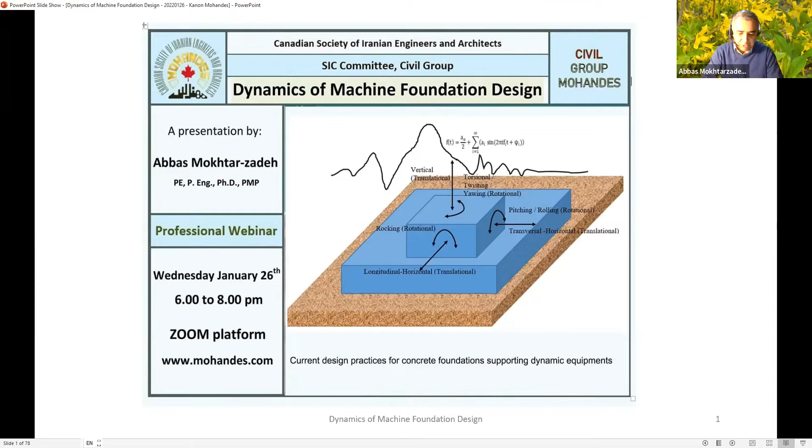Okay, the subject that I choose is dynamics of the machine foundation. As you see on the picture, there are some diagrams, nomograms, graphs, and some mathematics, but please don't be scared about the mathematics, because as engineers we deal with this every day, and we can grasp the basic topics of mathematics and understanding that is fundamental for our engineering practice.

At the beginning, I would like to express that whatever opinions I make in this presentation are my own. I don't represent my employer or the code and standard committees that I'm a member of, and I'm not a voice of those. Whatever I present here are items that I collected along my career from different sources, which I've compiled for this presentation.

As a brief outlook and abstract for the presentation, this is about the mechanics of machinery vibration. It belongs to the vibration theory of mechanics and structural mechanics, and it has applications in many industries like power generation, petrochemical process plants, manufacturing, land, sea, and air transportation, heating and air conditioning, aerospace, and computer disk drives, which recently became a major sector in industry, textiles, and home appliances.

And those are major items, some rotating, some reciprocating, and also impacting masses, which require a special mass and foundation design for the dynamic forces.

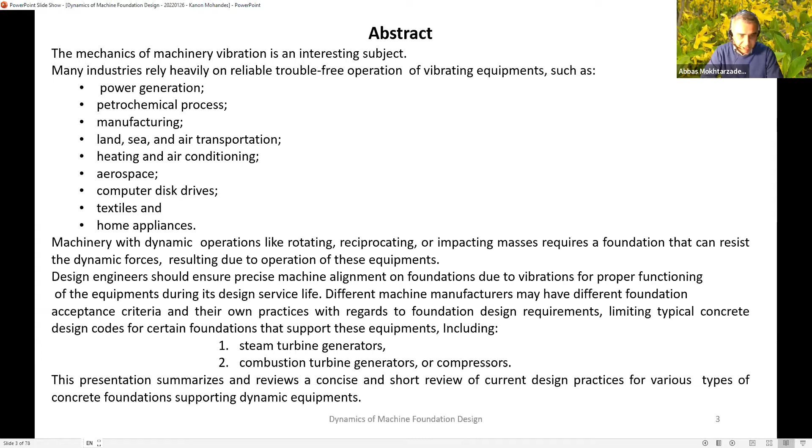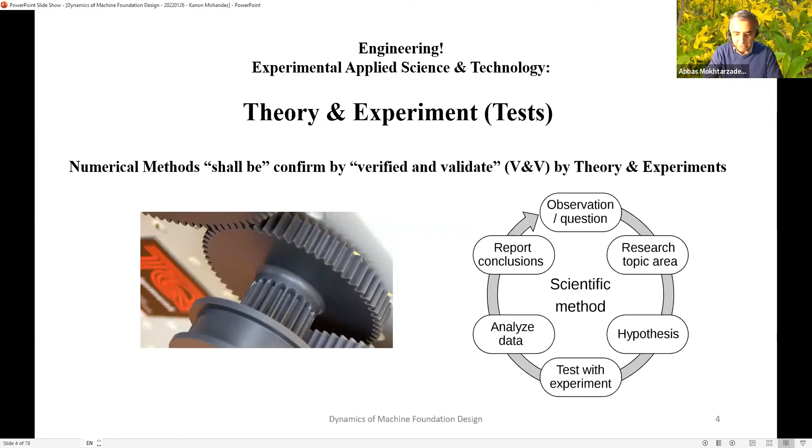Before beginning, I would like to emphasize two major items. In all engineering applications, we apply two considerations: one is theory, based on mathematics, and one is experiment and test, based on actual lab or experimental tests. The numerical methods we currently use, such as finite element analysis, should be confirmed, verified, and validated by theory and experiment. This makes it a circular way of applying the scientific method to our considerations.

The content we're going to go over briefly covers 8 subjects. First, we'll review the various types of dynamic foundations. Second, we'll briefly look at what's dynamic versus static, and why they differ. Third, we'll look at what modeling concepts we should consider. Item number 4 is dynamic analysis and the codes related to this type of foundation.

In chapter 5, we're going to go over the basic design data that we need. Item 6 is the core of the design, as we deal with strength and stability investigation. Item 7, we'll address dynamic analysis techniques very briefly, and item 8 covers some environmental aspects of the analysis as well.

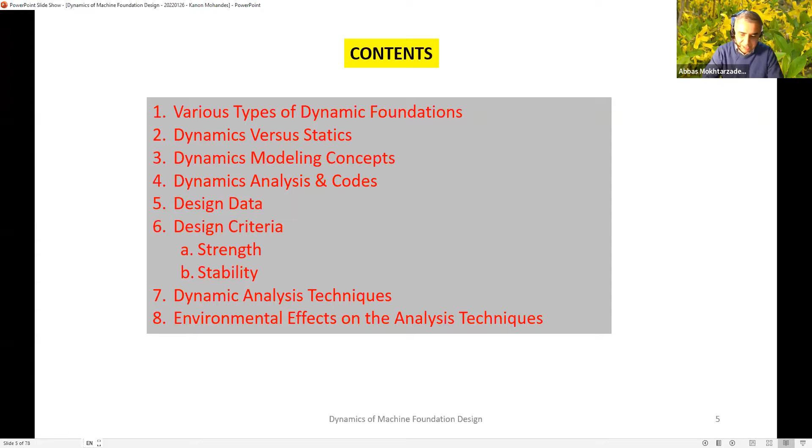In the first section, we're going to review the basic types of dynamic foundations.

The general conditions that we normally consider for every engineering project design are listed here, and many of you are aware of those. I highlighted in red some of the items that are very particular to this kind of machine foundation. We need to have a machine base configuration, which normally comes from the manufacturer.

Item 3 is a process requirement: what elevation we need to have this machine equipment located, and also number 4, what type of load we need. Most of the loads, in addition to dead load and live load, come from the manufacturer, and we need to have those before the design process.

Also, some of the amplitude and vibration requirements come from the manufacturer, item number 5, and items 6, 7, and 8 as well are requirements. As I mentioned, the majority of these items shall come from the manufacturer, and we need to have close correspondence with the manufacturer to get that data ready for evaluation in the design.

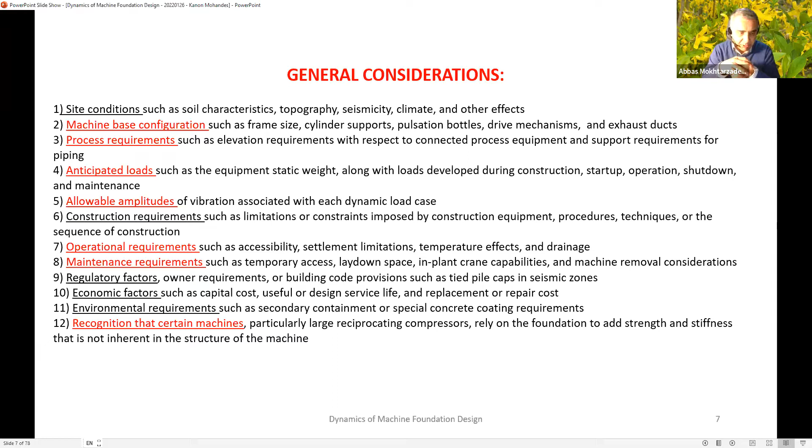We go first to the type of the big rotating machinery that we have. You see on the right side some pictures. This is a nomogram, kind of a free body diagram of this rotating machine, and on the bottom right you see a typical picture of one of these rotating machines normally used in power generation, consisting of different components that are important for investigation.

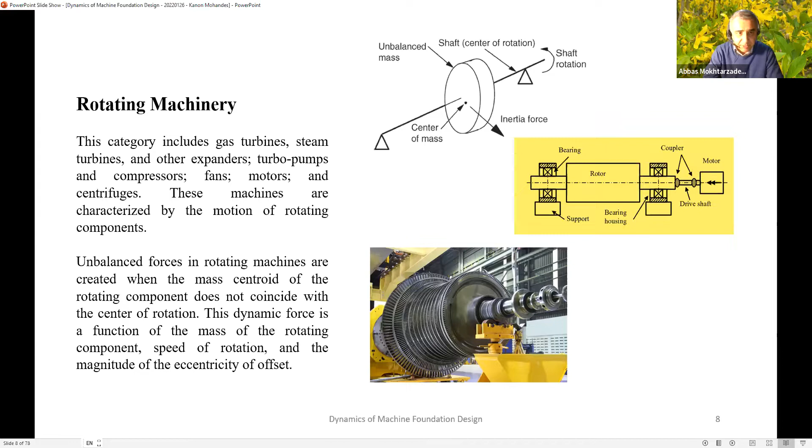Next type of big industries are dynamic foundations or machine foundations, impulsive machinery that is mostly used for hammer components and foundations, used for shock and impact in different industries, like generating ceramics or forging metal or other kinds of material in the industry.

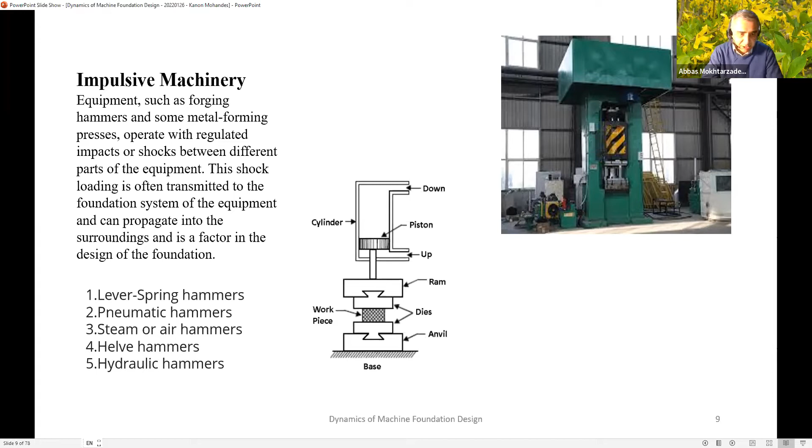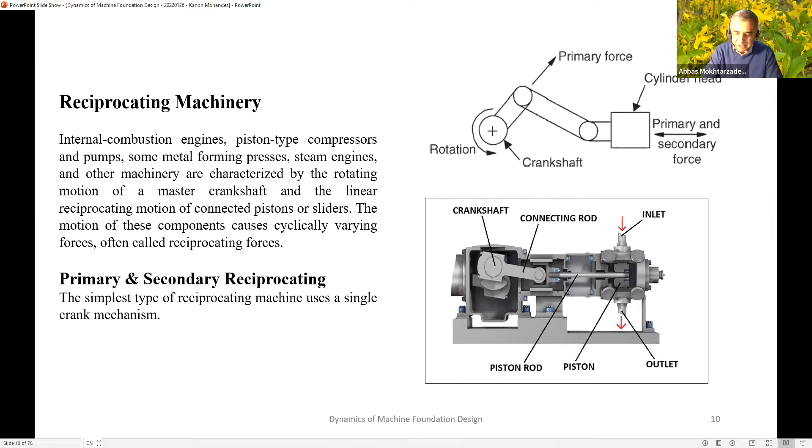About the foundation type, if we focus only on the type of foundation that we have, we may have several lists of foundations that we call different terminology in the industry.

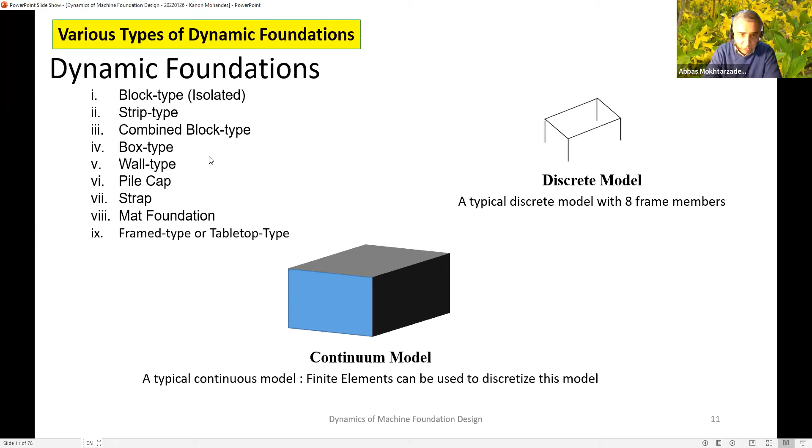On the upper right and lower middle, you see discrete models or continuum models, which mostly come into play in the industry as a kind of finite element numerical method. You may use these types of methods, either as a frame element like a discrete method, or a continuum model like a finite element mesh in the system. We'll go over typically to show how each one looks.

Block type foundations are typically a mat foundation with a pedestal on top. Combined block type foundations are similar, but we may have several pieces - here I show 2 pedestals, but we may have 2 or 3 or more, combined with different equipment sitting on different pedestals. Or in some cases, we may have a single foundation mat, shown on the lower left and lower right.

We have table-type foundations that are mostly used in petrochemical plants and mostly in power plants for hosting the turbine and generators. These holes that you see on the table top are needed for the piping or routing of the various components of the equipment on the foundation.

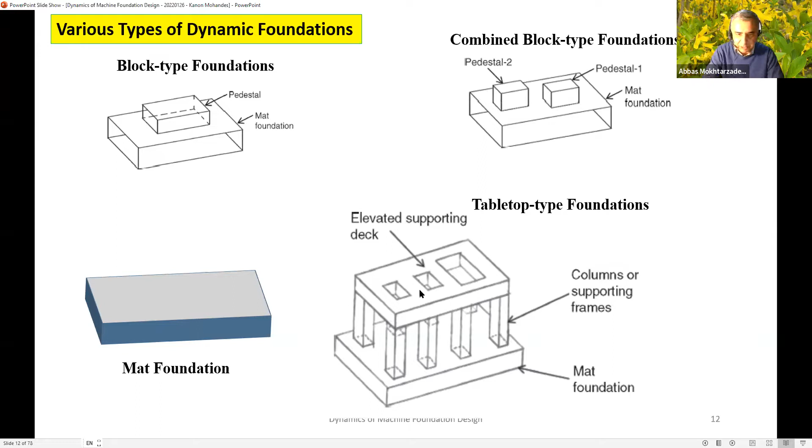Another general type of foundation is the strip type, which is a kind of very long strip like a mat foundation, or a wall type, which is kind of two walls sitting on the mat and hosting the deck, the foundation, and the equipment.

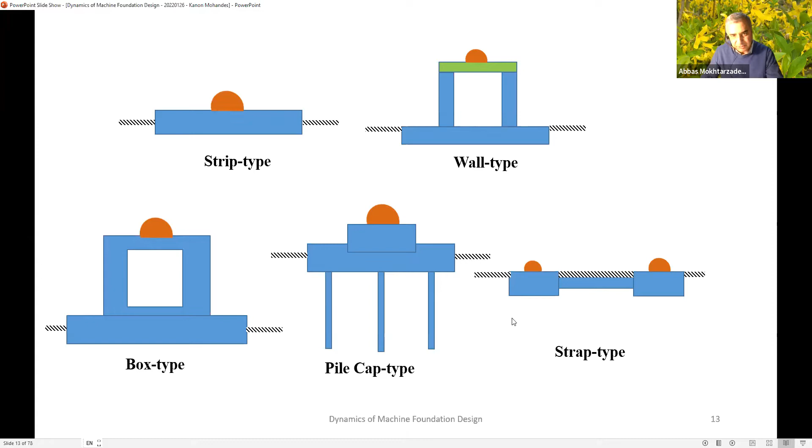Or box type, which very rarely happens to exist in the industry, or pile cap, for an area where the ground medium is not enough to support the mat foundation. We need to use piles to go to deeper layers of the foundation that are strong enough, or strap type foundation, which is another type.

This is a typical schematic dynamic machinery foundation on the tabletop, illustrated here. Several components exist: one is a mat foundation at the base that sits on the ground or medium, and we have several columns supporting the tabletop deck or foundation, and also the rotating equipment illustrated here. This dashed line that you see is the axis of rotation.

As you see, several items are important here, specifically the interface between the mat foundation and ground, the interface between the tabletop and columns, and also the interface between the foundation and equipment itself, table deck and foundation as well. Each of them has a certain way of evaluation, and we have to design and consider this in the evaluation.

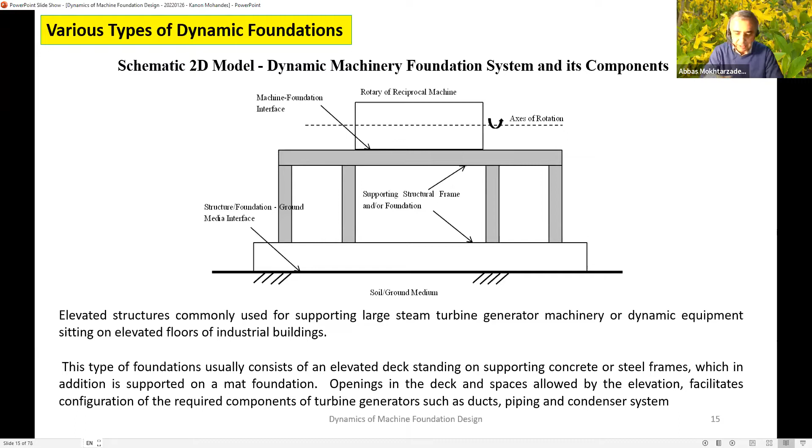Next item, we go on the first topic on the dynamics and the statics. What's the dynamics and statics? This is a very basic topic listed item that I provided here. What's the dynamic and what's the static?

Whatever it is dynamic, it means that it varies on the time, and it has various functions that is acting as a kind of load, versus on the static, we have a single value for the load, and we don't have a variation on the time.

And on the dynamic, because of this variation, we may define an amplitude that is the maximum value of the curve or function for the analysis, and frequency, that is the frequency of the change and repetition of the change along the time.

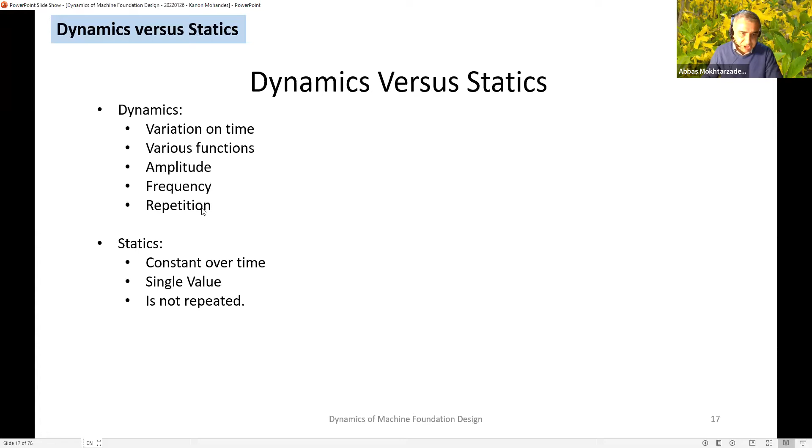As we show it on the graphs on the next slide, here you see this is a general type of the actual curve of the variation along the time for a type of load.

This is a kind of impulse load type, and this is a step force type. This is a triangular pulse excitation, and this is a ramp load as well.

And one of the very famous harmonic loads that we have, a steady state showing at the bottom, that is like a sinus or cosine function varying along the time.

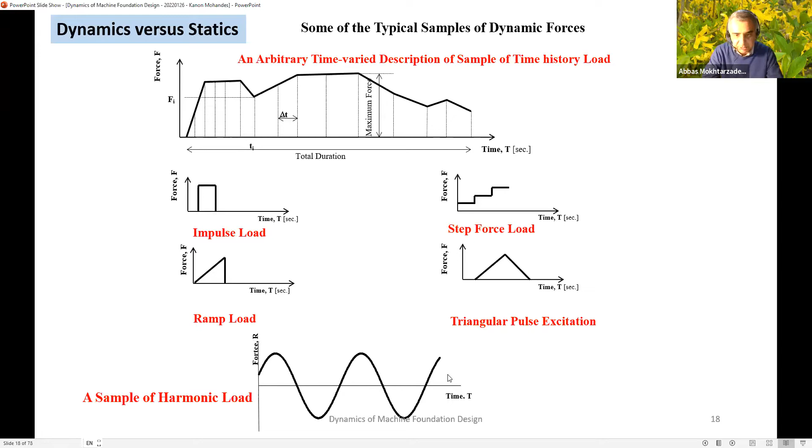This is the basic formula of the equilibrium for the external and internal forces. On the left side, the external force, that is either one of them gonna be considered as FT.

On the right side, various components of the internal forces that comes by stiffness, damping, and inertia of the foundation. And I will illustrate on the next slide as well.

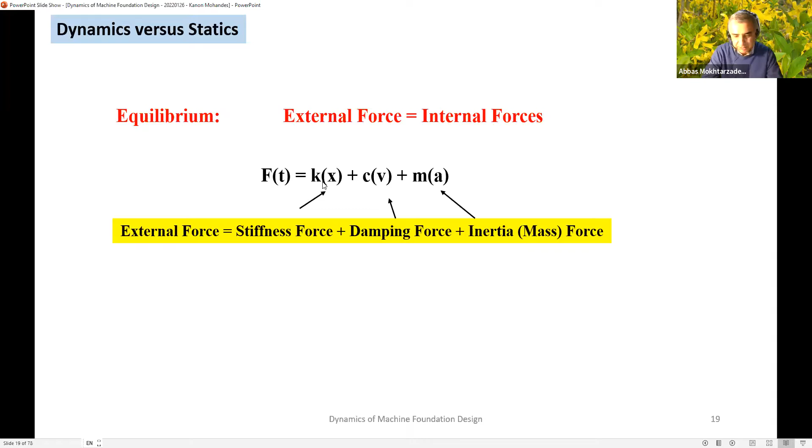I would like to express my honor for three of the major mathematicians that built up our knowledge of engineering mathematics in the 19th century: Joseph Fourier on the left, and Wilhelm Bessel and Joseph Lagrange on the right.

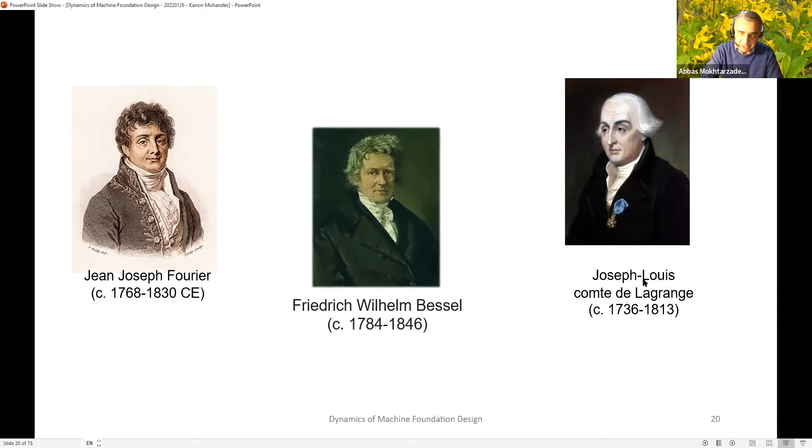All of the equations that we're going to show briefly belong to their emphasis and works.

One of the important functions in mathematics provided by Fourier involves harmonic loads and functions. It means that every function that we have is the addition of several sinusoidal functions.

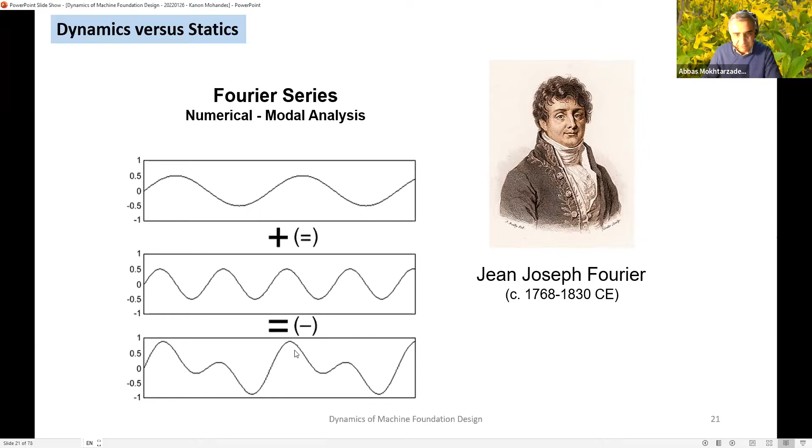I will show it briefly on the next slide. If you consider any random or various different function that is continuous and linear in kind of derivatives, we can define this as a kind of summation of multiple functions with different frequencies.

For example, it has one single amplitude, kind of a static function, plus one bump of one sinus function, or double, triple, fourth, or fifth.

And this one shows on this series that comes from Fourier. Therefore, instead of analyzing this difficult curve, we just summarize them by simple harmonic functions.

Each harmonic function has one amplitude, one frequency, and one phase angle. And this way helps out our work very tremendously, both numerically and in understanding the case.

When we see a function has 10 modes, when we're analyzing a system that has 10 modes, it means that we only take 10 of these summations in the analysis. And we have to consider how many modes we need to consider, which is another factor of the investigation, depending on various factors.

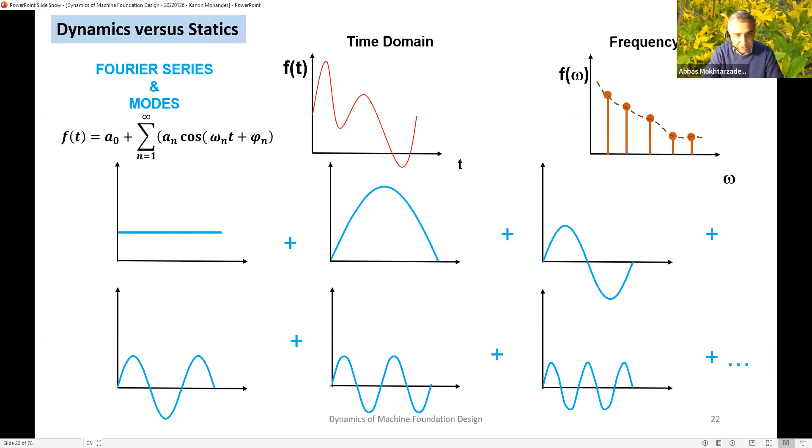Next, we go to the dynamics modeling concepts. On the dynamic modeling concepts, we have to first go to the degrees of freedom. As all of you might know, the degrees of freedom are the various independent degrees of movement of the system.

Three of them are translational and three of them are rotational. On the translational, we may have transversal or longitudinal direction and vertical.

On the rotational, we have pitching or rolling, rocking or torsional, which I will show on the next slide. In addition, we have actions, movements, and masses that we have for different components that we have to consider.

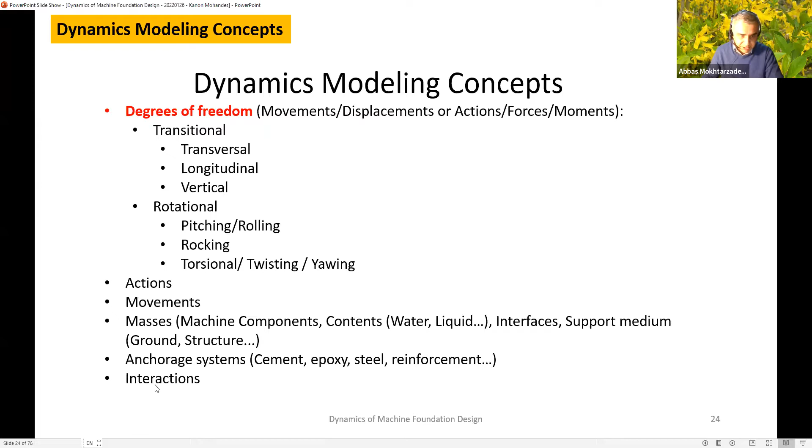And also the anchorage system and interaction that we have to investigate.

If you see on this basic configuration, we have three translational directions: this is vertical, this is transversal, this is longitudinal. Which one is transversal and which one is longitudinal? This depends on how the equipment is oriented.

If the orientation of the shaft is located this way it's longitudinal, and this way transversal. And these three are the three translational degrees of freedom.

And we have three rotational as well. Rocking is around the longitudinal axis, pitching is around the transversal axis, and the torsional or twisting is along the vertical direction.

If we understand this way of rotation and movement caused by the equipment on the foundation, it's very helpful to understand the basics of the design of the machinery.

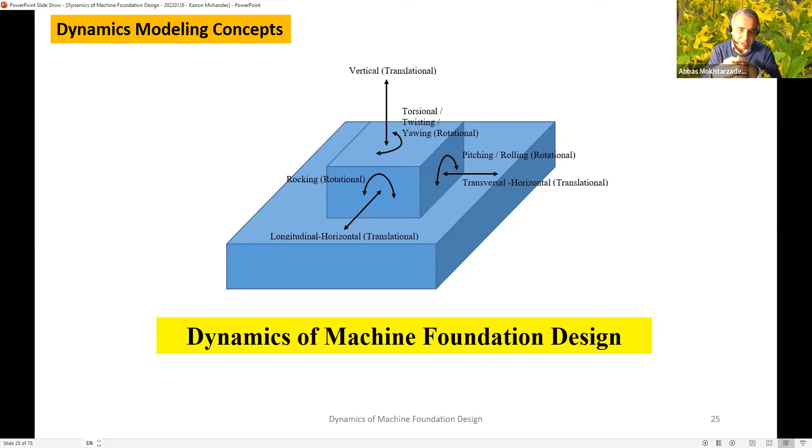And two assumptions that we assume at the beginning. One is linearity. We assume our system is linear. If we go nonlinear, it becomes very complicated.

It is out of the scope of this presentation. But briefly, in reality we have nonlinearity, but we simplify it using linearity to make our work much easier. And we need to have some initial condition. For example, if the initial displacement or velocity exists, or we assume zero. In this presentation, we assume everything is zero at the beginning.

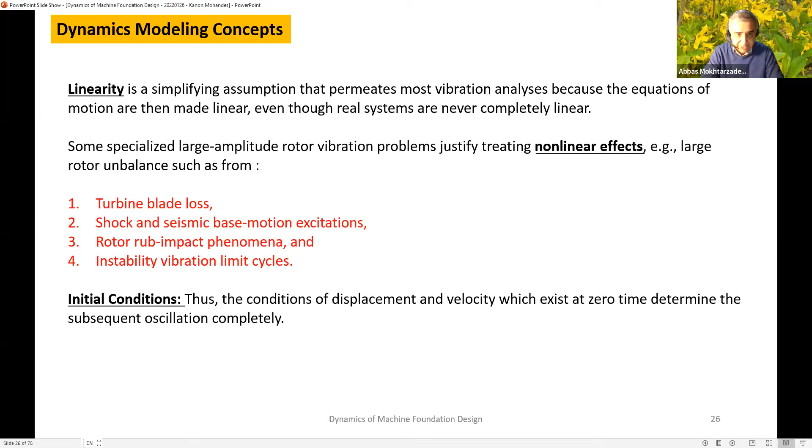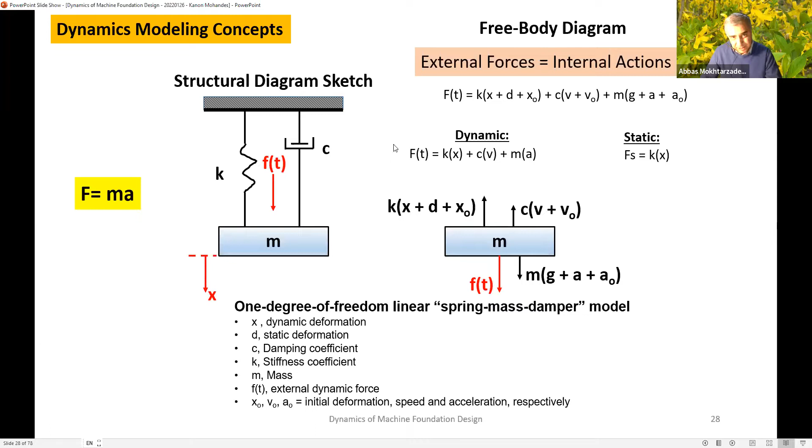But if it is a foundation sitting on the ground and force is acting down, this is the approach. The inertia of the mass is going to be helping the extra force against the force, and therefore the algebraic summation of these numbers has to be viewed correctly.

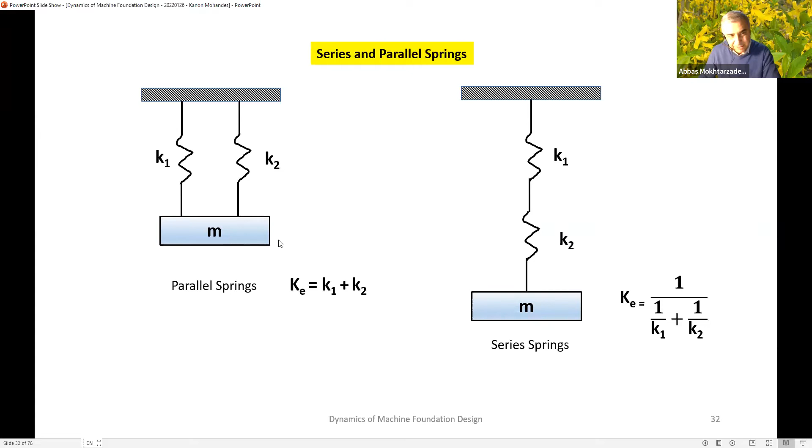Another very simple way of extracting the equivalent stiffness of the function is based on statics, not dynamics. If we have parallel stiffness, it means we're adding them together. But if we have series, it's a different way - the action of stiffness is much smaller than in parallel. Therefore, in most cases, if we have a parallel function on the mass, we have more resistance on the operation.

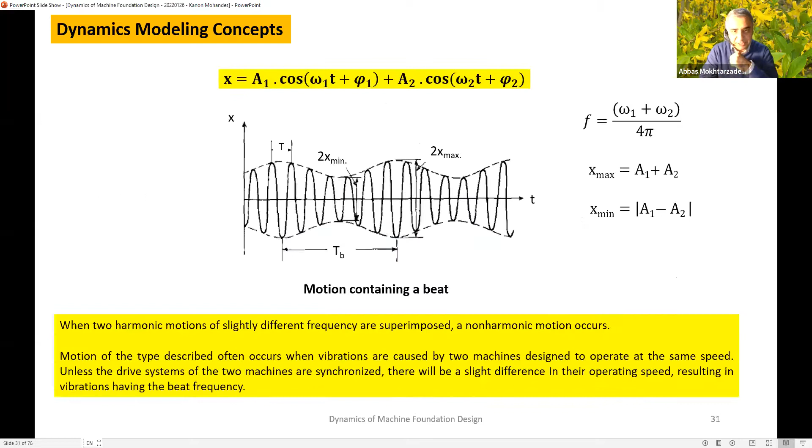If you have damping, what happens? For now, for this discussion, we assume we don't have damping. But if we have damping, what should we expect to experience? For damping, there is a function defined as the critical damping function.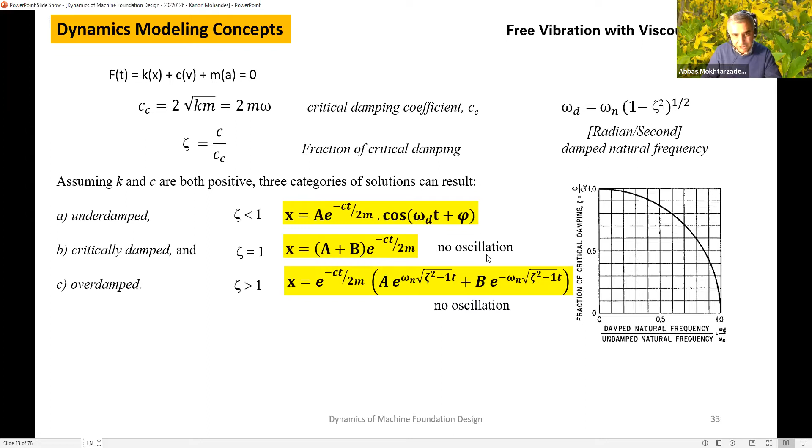As you see, this one is more close to harmonic, and this one is not harmonic - no oscillation exists in this case. This is the main difference. If we see the function on the graph, we see a trace of the function that gradually dissipates, as shown more clearly in this graph.

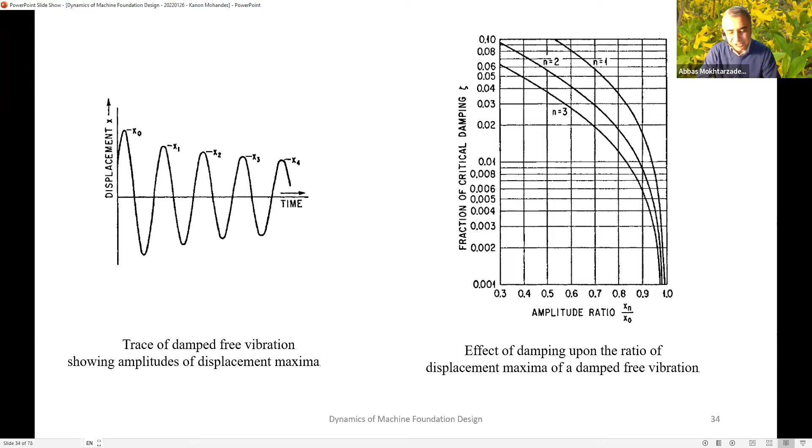If we don't have any damping, the amplitude - the highest value of acceleration and displacement - will be close to the actual displacement. But if we have damping, say 10% damping, we get almost 70% reduction in amplitude, and we see lower acceleration or vibration for the equipment impacting the foundation. As you see, if we have more damping in the system, we have less effect on the foundation, and foundation design becomes more efficient and less elaborate.

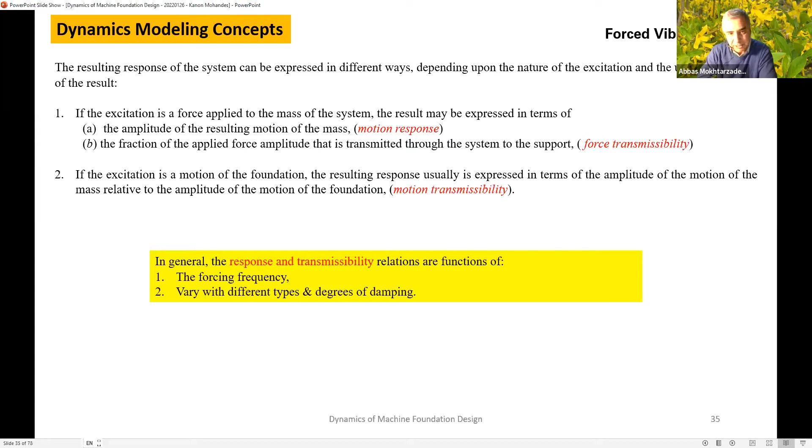For dynamic foundations, we have three concepts that I don't want to go over much here. This is called the transmissibility function, meaning how much force the equipment transfers to the foundation and ground. Based on that, we have to elaborate. This is a function provided by the manufacturer, and whatever the manufacturer provides, we have to investigate in our analysis.

One simple way we normally use in our evaluation involves the isotropic homogeneous elastic interaction based on the Westergaard and Boussinesq functions that we know. If we have a function exerting a P force on this area, we can easily go over the nomogram and diagram that we have in literature and find how much stress we have on the ground.

This is the way that we want to see if our medium or layer of the medium underground is acceptable for this kind of stress or not. And this goes with the soil mechanics.

As you see here, machinery foundation design involves a combination of several different individuals: one mechanical engineer who provided data for us, one soil mechanical or geotechnical engineer who investigates the function of the force on the ground, and one structural engineer who designed the foundation. These three individuals have to have close correspondence to transfer data and information to make sure our design is acceptable and good.

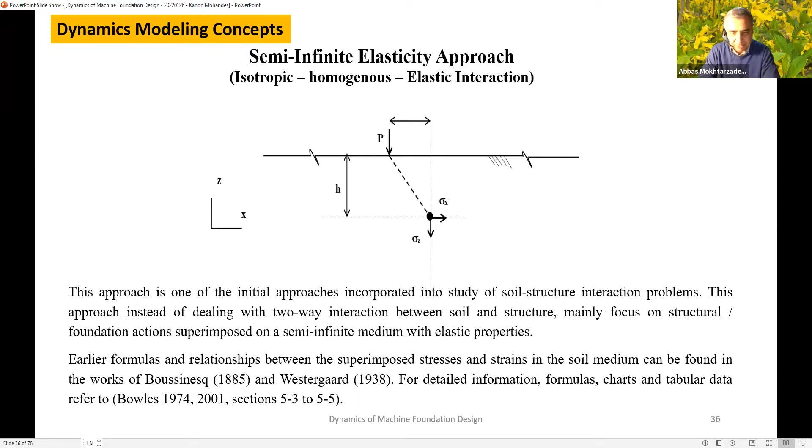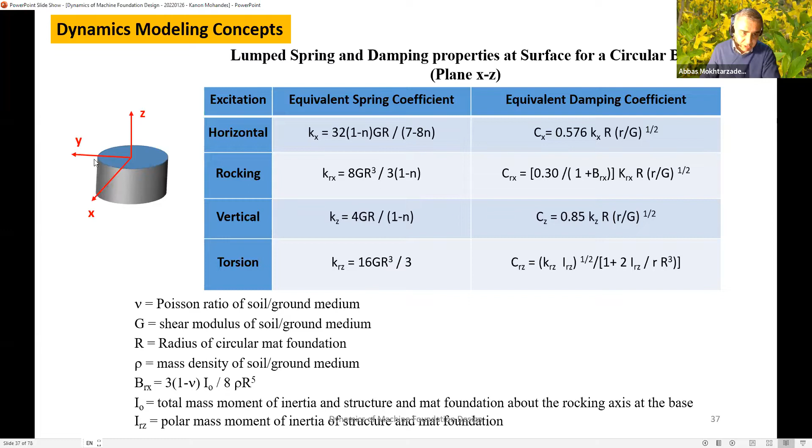These tables that I showed here are another way the literature in the industry shows how much forces and interactions we may have on the foundation, either horizontal, rocking, vertical, or torsion, and also damping, depending on whether our foundation shape is circular or cubical, rectangular shape.

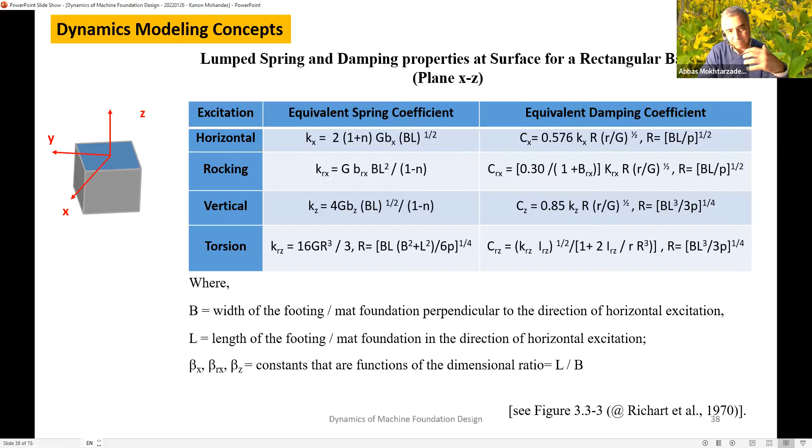I don't want to go into this mathematics, all of it exists in the literature, but I want to give you some hint that for each of these we have a ready formula that exists and we can use it for our investigation.

The code that we have, the analysis that we have on the system, mainly comes in 6 different scenarios. One of them is static equivalent. The static equivalent, which many of you may know, we assume, specifically on the seismic side, is more frequently used in the traditional method. We assume a factor, for example 0.2 or 0.1 or 0.05, and multiply it by the dynamic force, for example seismic or mass of the equipment, and apply it on the foundation. This is very simple, this is kind of a static load, and we don't have dynamic analysis.

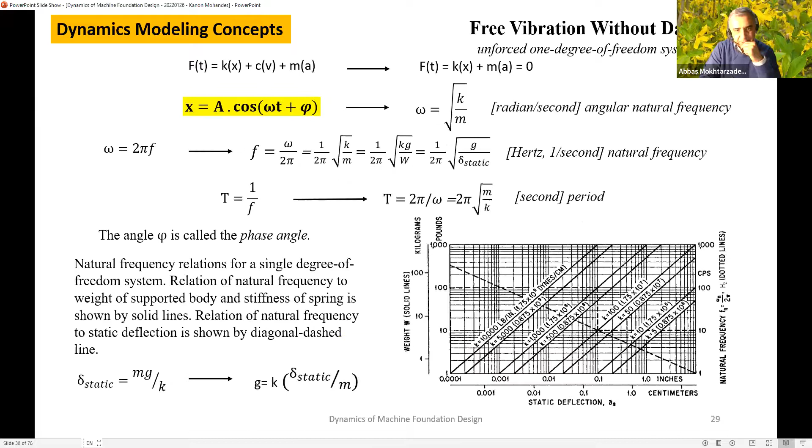This second one is used only to extract the natural frequency, the way that I extracted it earlier to calculate the natural frequency. Therefore, this second item is not a structural analysis, but just extracts the natural frequency.

Item number 3 is steady state, a harmonic function, a sine or cosine function, or kind of repeated function that we want to analyze. Response spectrum is also another way of analysis that only considers the system as a single degree of freedom. And time history is a general analysis that considers the whole time history of the analysis, and impact as well as similar functions.

The codes of design that you have in different areas: in Canada we have concrete and steel code, and also the national building code, and also the CISC manual. In Europe, British, German, and European Eurocode have become very popular and free to use. And in the US we also use ACI, AISC, and IBC as well. These are some references that we may use for this application.

Mostly we use item number 1 in the United States, the ACI report on foundations for dynamic analysis. And in Canada, we have the Canadian Foundation Engineering Manual, chapter 14, specifically devoted to machine foundations, which has very simple formulas that I provided here, a few of which exist and you can use. Another code is a recently published ACI concrete foundation guide for turbine generators, for the tabletop generator. These 4 items are among the current valid references that we can use.

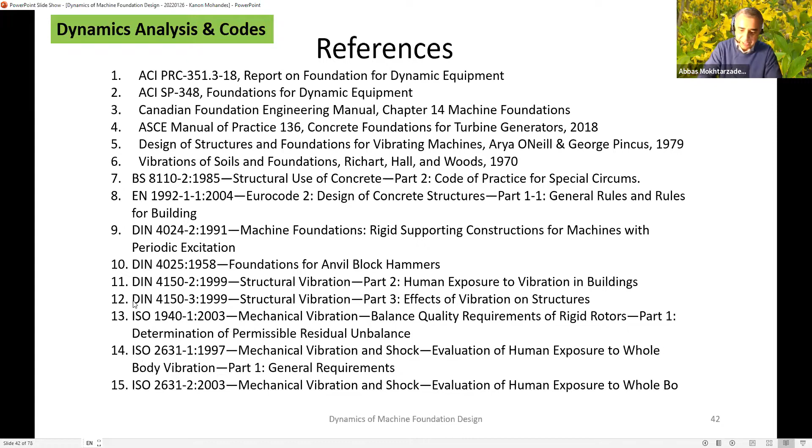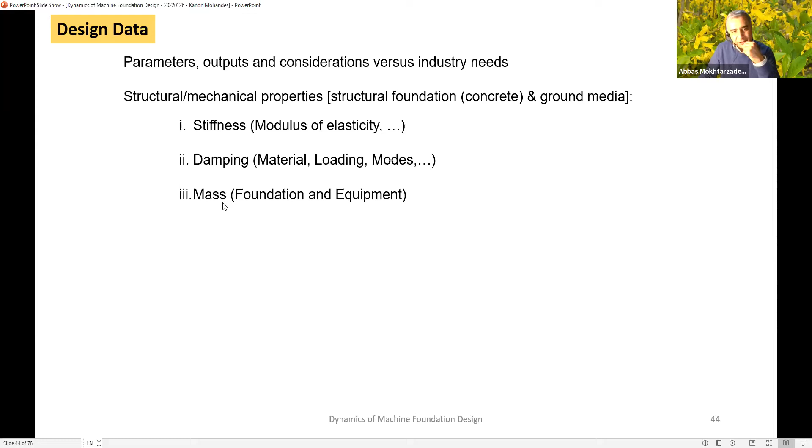What information do we need as input data, design data? We need stiffness of the material, sometimes for equipment sitting directly on the foundation, but sometimes sitting on steel which then sits on the foundation. Therefore, we have to include both steel and concrete in our evaluation. We also need damping information: what damping for the material, what damping for the loading, and what damping for the modes of analysis we have. And we also need to know the mass and weight of the equipment and foundation.

We have to emphasize structural damping. It is kind of various damping - we don't have one single damping. I want to emphasize that most of the time in practice I encounter this problem that we understand only one damping. Damping can come from friction, some of them friction damping, some internal damping that comes with the material of the system, damping on our foundation, damping that exists between various components of the equipment, or between equipment and foundation, or between the foundation and the soil, etc. Therefore, we have to know which damping we are talking about, and especially when entering it into the computer program, we have to know exactly which one we have, and ask the manufacturer what damping exists for our evaluation.

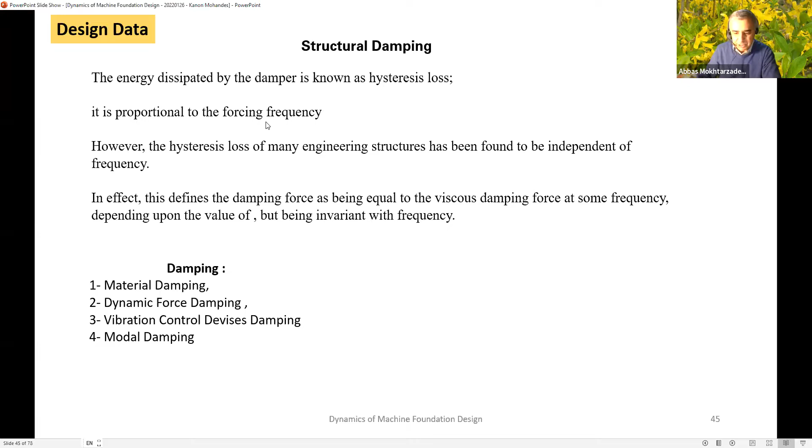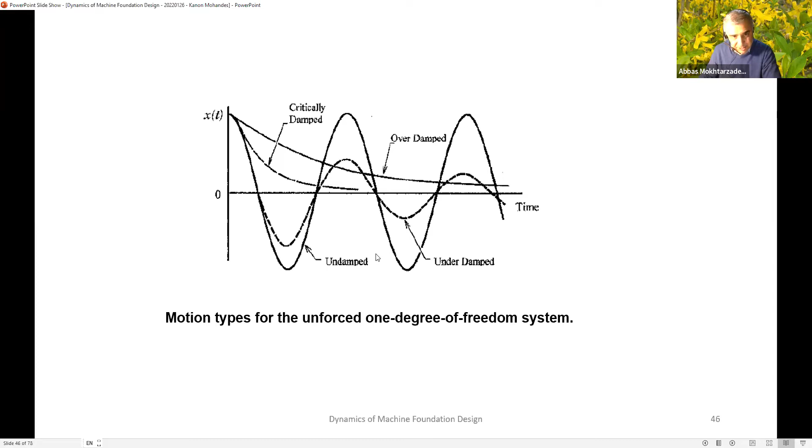The consequence of damping is very clear in this picture. It means that if our function is like that, it gradually becomes like this, and eventually dissipates like this, depending on what kind of damping we have. If we have underdamped, the shape is going to be this, and at infinity it's going to dissipate. If it is overdamped, it's going to be like this. But if it is undamped, it's a very harmonic shape like this.

The load cases we have are mainly two: operating load cases, loads during operation, and accidental load cases. For example, sometimes we shut off the machine - when we shut off the machine, there is an accidental shutoff load that happens to the foundation, and we have to evaluate that. For example, the machine is already shut off and we want to start it again - again there is an accidental force that happens during that, and we have to evaluate that accidental force as well. That is the type of accidental force we consider.

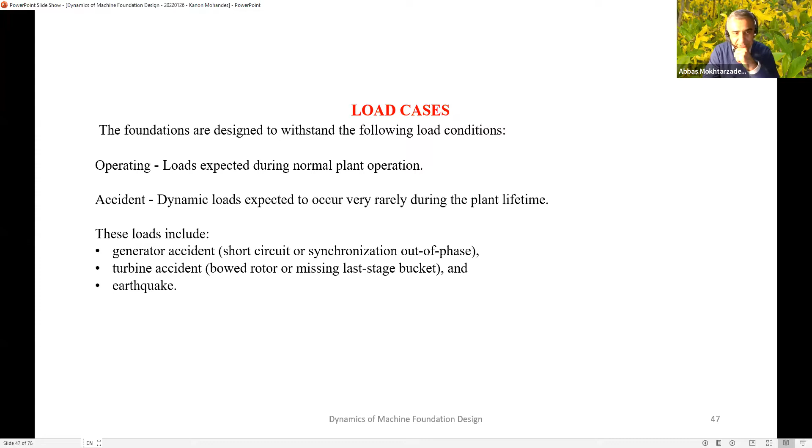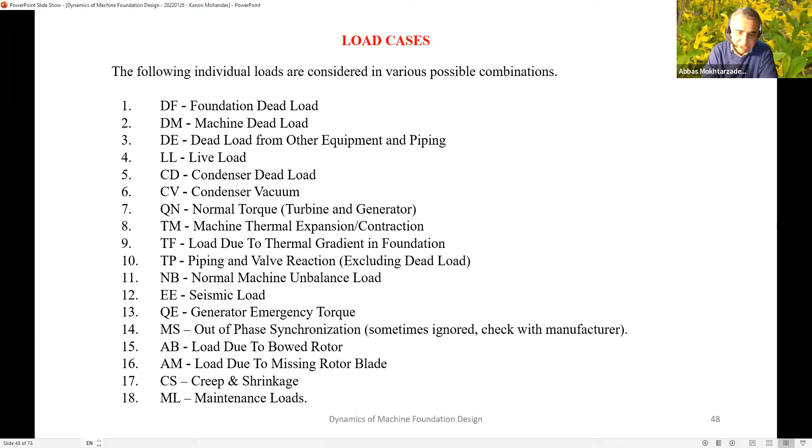This is a list of the various forces that we may experience on the typical tabletop foundation that I illustrated here. The majority of them, we have to request from the mechanical engineer, vendor, or manufacturer to provide for us.

One typical thing illustrated here very well is that we can do it with hand calculation. Assume this is a shaft of the foundation that rotates along the clockwise direction. If you have a gas turbine and generator, the generator forces are shown by the red flashes and the gas turbine by the blue flashes, and it is kind of coupled. If you have a couple, we can divide it by two loads with a space in between. It's easily F equals M divided by space, or force equals torque divided by space - very simple calculation. If you know the geometry of the location of the sole plates on the foundation sitting on the ground, it can easily be calculated.

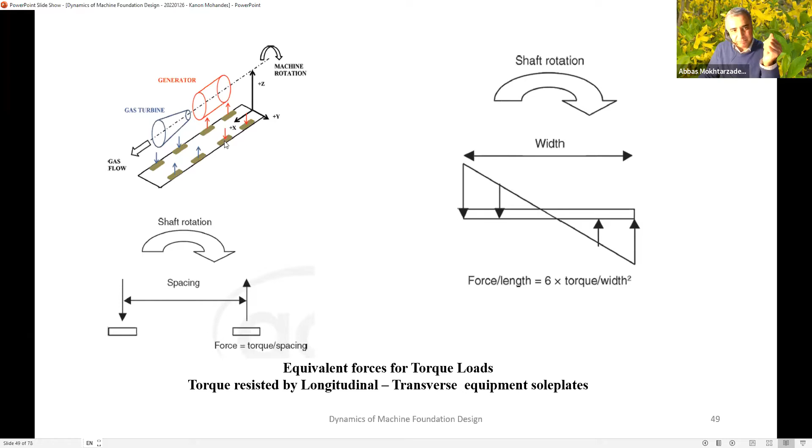In some cases, instead of the point load here, we may have various loads that we can calculate by this simple formula as a linear distribution as well. This way we can easily find the impact load that comes from the rotating machine on the foundation, as equivalent forces for the torque force.

For load combinations, it also depends on the various codes you consider. If you consider NBCC, you have to use that code. If you use ASCE or IBC, you have to use that code. Or if you're using a European code, you have to use those codes defined in that building code.

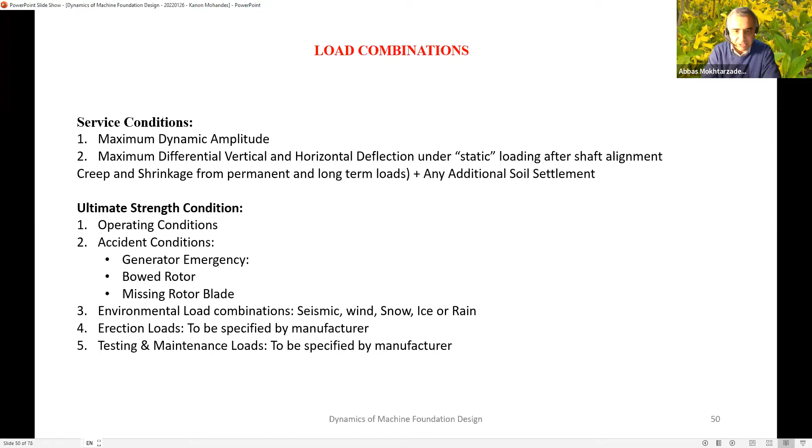For the strength of the foundation, we normally have to check several things. One, bearing pressure - if the load is sitting on the ground, and our foundation is about, say, 100 meters by 100 meters, we have to calculate how much bearing pressure exists on the ground medium and check it versus the capacity. This is a very simple calculation, but sometimes it becomes difficult because in addition to the vertical load, we have a couple, and we have to divide it like a simple foundation where you have a column with compression and also a bending moment. You have to see how you can distribute it under the footing and calculate the maximum bearing pressure and capacity. The second check is one-way shear and two-way shear, again similar to a regular foundation.

Flexural is similar, but we have to consider some items I provided here, item number 5 and 6. One is the tension and compression effects - it means that for these functions, one-way shear and two-way shear, when we have tension on the section, it is different than compression, so you have to watch out for that. And also on the last item, we have to check the bearing.

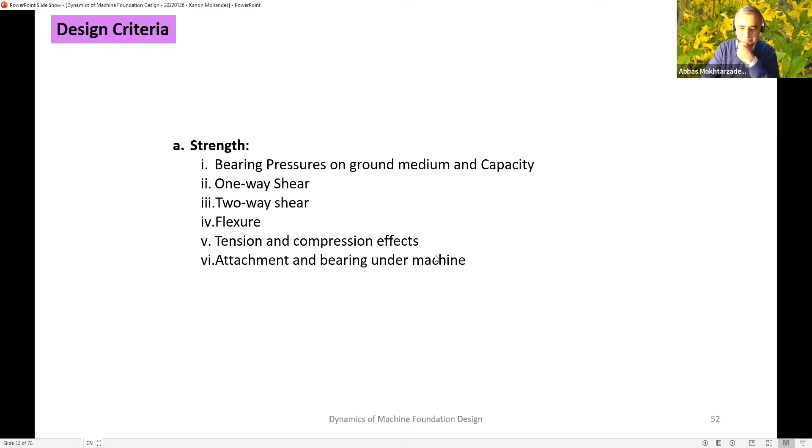This is several items that I provided here as a general outline. For the support of critical machinery, allowable deflection, not allowable load, is very important. Deflection and displacement are very important. For example, because this machine will rotate or operate during dynamic operation, we have to make sure that during this operation the foundation will not deform in a way that changes the machine's orientation.

That is one of the important functions. Normally, when we design the foundation, we design it 3 times or 5 times larger than the equipment weight itself. Therefore, the design for bending or axial force is good enough, and in most cases we need mostly minimum reinforcement for the design. But the major important item to check is the deflection or displacement at the place of the sole plates or anchorage, or under the foundation, making sure it doesn't go beyond limits. Most of the time they will say 0.005 inch displacement or so. Those are very important for this critical machinery.

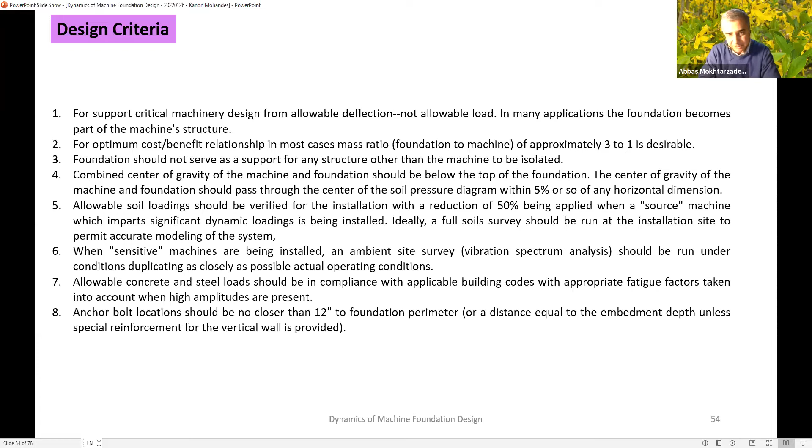And because of that, we provide 3 times or 5 times the weight. Normally, 3 times is recommended for rotating equipment, and 5 times is defined for reciprocating equipment as well. So this is several items we have to consider. For example, anchor bolt locations should not be closer than 12 inches to the foundation perimeter, but that's one consideration for placement in this recommendation.

One thing we have to consider, specifically in finite element applications, when we use the shear check, we have to check shear from here to here. It means checking just a 1 foot length is not enough. We have to check the entire length of the foundation mat for the one-way shear check. That's mostly because in finite element analysis we will see very concentrated forces here, but it is actually distributed. We have to consider the integration of all forces along the line for this purpose.

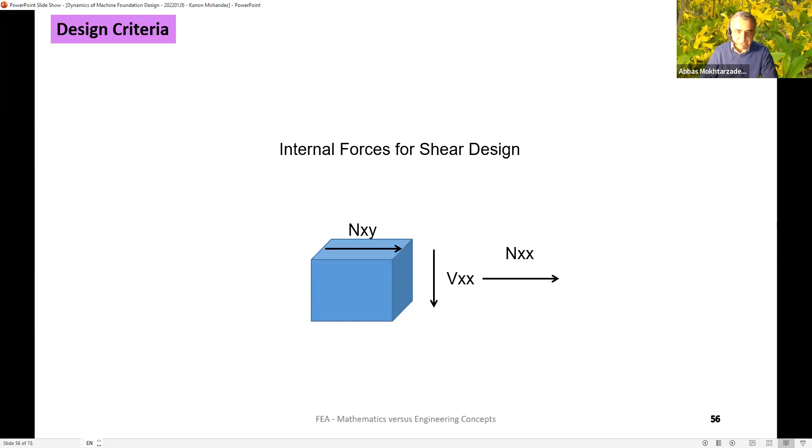The components we have for the shear design of the foundation are very important: this component, the axial force, is very important, this is normal shear, and this is in-plane shear. Because our foundation is very big, normally it might be 3 feet or 4 feet, or 1 meter or 2 meters thick, this one-way shear plays a very specific role in our evaluation.

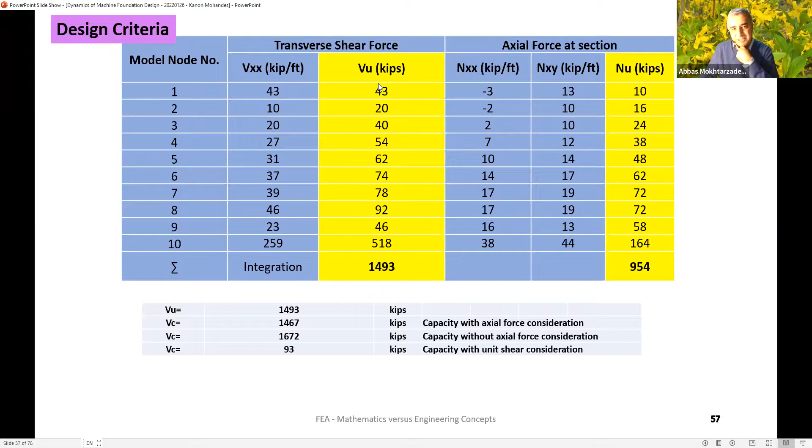Here is a sample calculation that I provided. We have normal shear, we have axial force — you see some areas we have negative, in some areas we have positive — and this is in-plane shear. We have to calculate accordingly how much all of them contribute to our calculation, to check the final design forces VU versus the design requirement.

Another important thing on the deep foundation, as you remember from undergraduate courses, we have a rectangular block. We assume we neglect the tension area and only consider the compression zone.

In the compression zone, we assume linear distribution of the strain, and we assume this Charles Whitney stress block. This is all assumption. In real practice, we don't have such condition. We have a nonlinear stress curve in practice, and that plays a main role in our consideration.

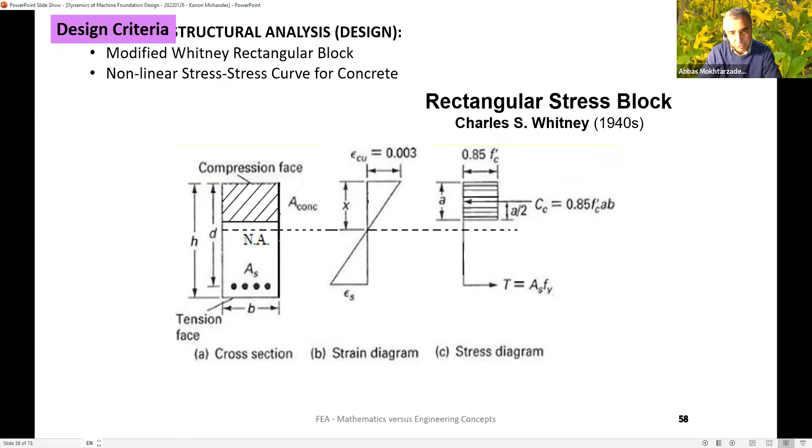The reason I brought this up is that in most cases, if you have a large or deep foundation, this rectangular stress block approach used when designing the foundation is not valid anymore. We have to use different methods provided by code, like the strut-and-tie method or a kind of deep beam methodology for design, which is provisioned in both Canadian and US codes. This is the real way of considering a nonlinear method for this design. There is an article published in the ACI journal in 1964 that nobody else has really looked through since, but it's very practical for deep foundation design.

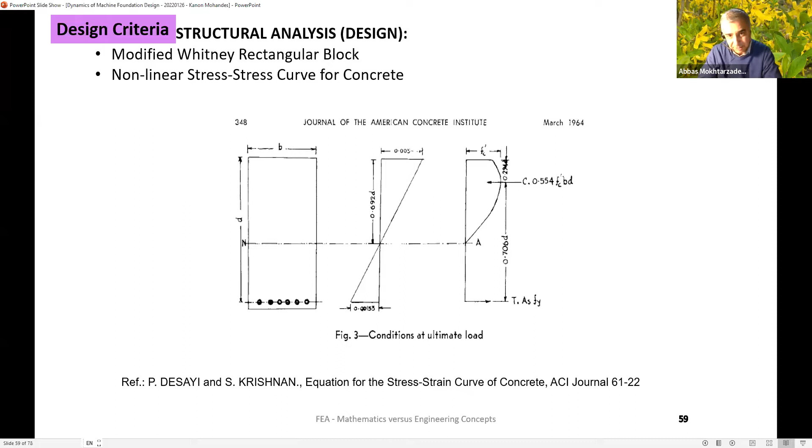The types of stability we check are sliding, overturning, and uplift, which is very popular like other types of foundation design. We check various factors that exist in the industry and in the codes, none of which are equal to each other. Some say sliding and overturning factors of 1.5, while for seismic some say 1. We calculate the overturning moments versus the resistant moments to make sure that ratio is less than 1.5, which is very popular. Also, uplift versus water in the soil ground might play a role in this area.

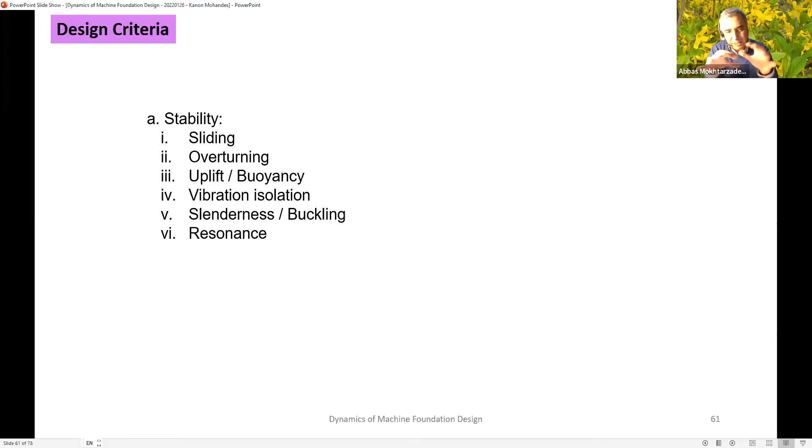Vibration isolation is another factor we have. In some cases, isolators are used in the system, and we have to check based on the criteria the control system vendor provided, and also consider slenderness buckling. This is very important if you use structural steel underneath the machine equipment. If the machine equipment sits directly on the foundation, this slenderness or equipment buckling is not important. Also, resonance, which I highlighted.

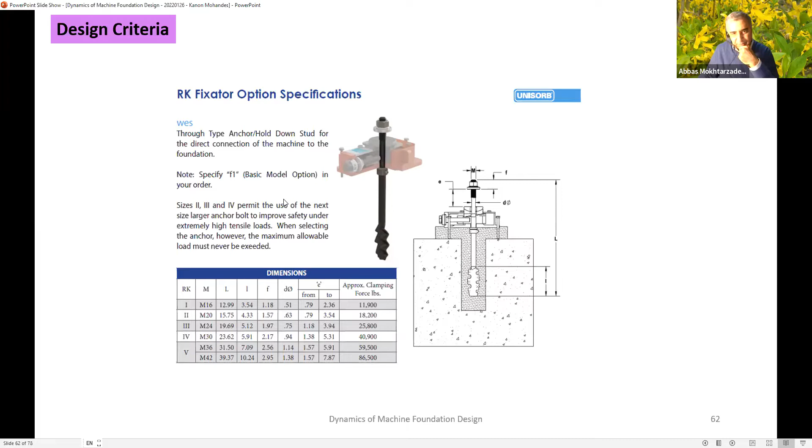This is one of the typical fixators normally used in petrochemical or power generation plants. It's not a regular anchor bolt; its design is not like a regular anchor bolt, and there's a specific way we have to consider the design. Normally we use a pocket here and provide epoxy grout. We have to check the interface between the epoxy and the concrete, the pull-out, and various other ways based on ACI chapter 17 for this.

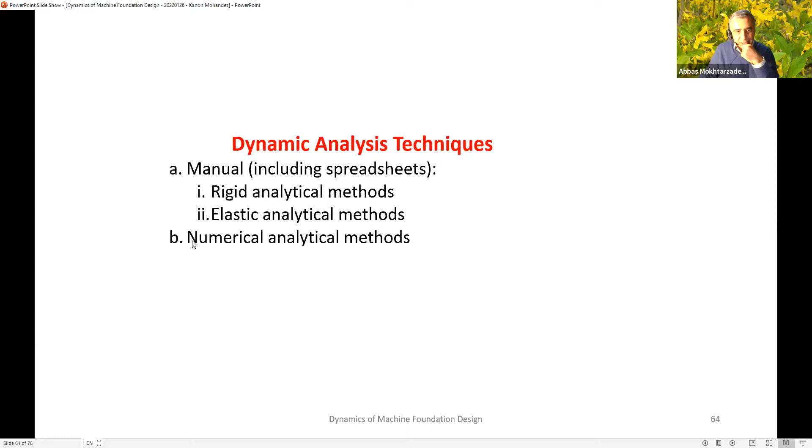As I mentioned briefly in my dynamic analysis, we have the rigid analytical method given in chapter 14 of the Canadian Foundation Manual, or various other manual methods, or the elastic analytical method already provided in industry and literature, and the numerical finite element method that is popular nowadays.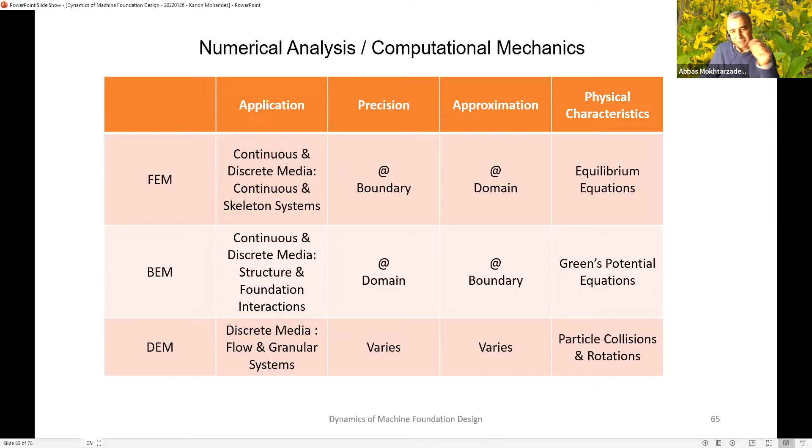This is a brief consideration of the various numerical analysis methods we have: finite element, boundary element, discrete element. Nowadays we don't use discrete element much, mostly just in academia, but finite element is very popular, the first one. It is accurate on the boundary but approximate in the domain. Therefore we have to watch out - whatever we have, it is an approximation, not accurate values.

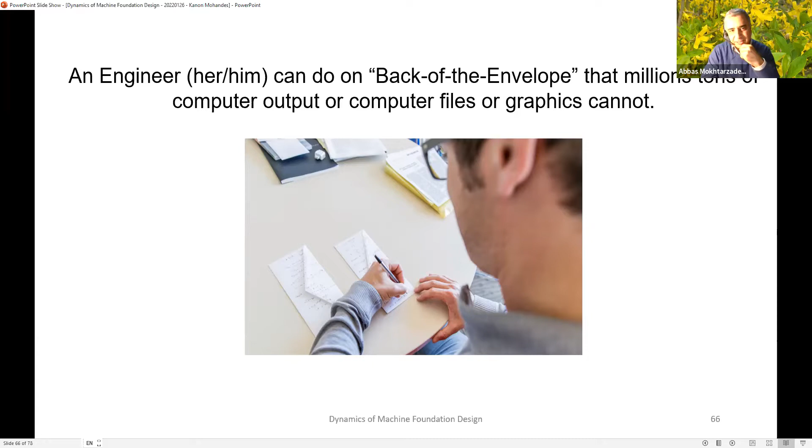You have to remember that an engineer can do calculations on the back of an envelope that millions of tons, or millions of terabytes, of computer output and files cannot do. Remember, the basic formulas we have in engineering play the main role in understanding what these computer tools give us.

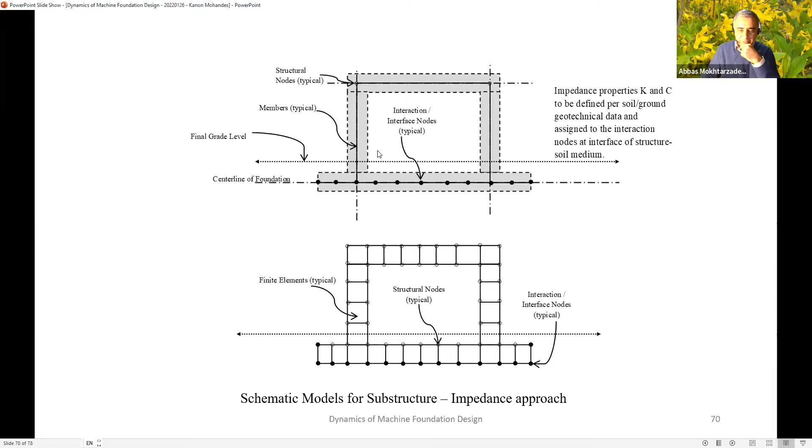This is a diagram of a typical finite element model that you'd use, but normally you have different ways. I'm not going too much deeper into this, but mostly we have different ways of modeling the system with finite elements that we can use. This is a very typical type of model that we have. If you have soil and pile, that's going to be different, and out of the scope of this quick presentation, along with various integration methods provided by Gauss that help with the numerical methods.

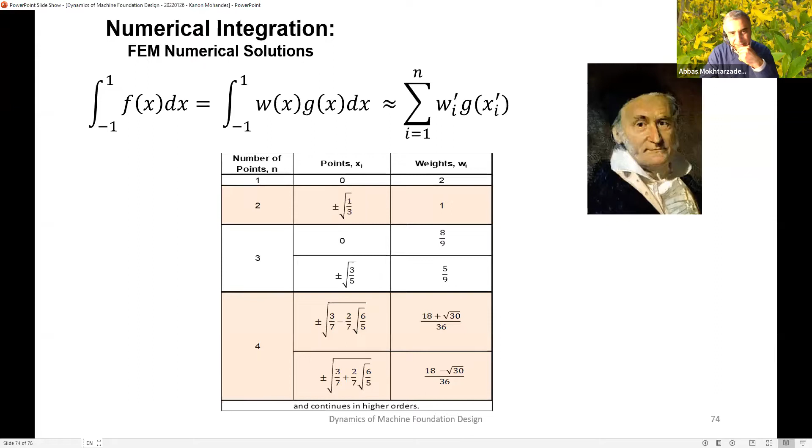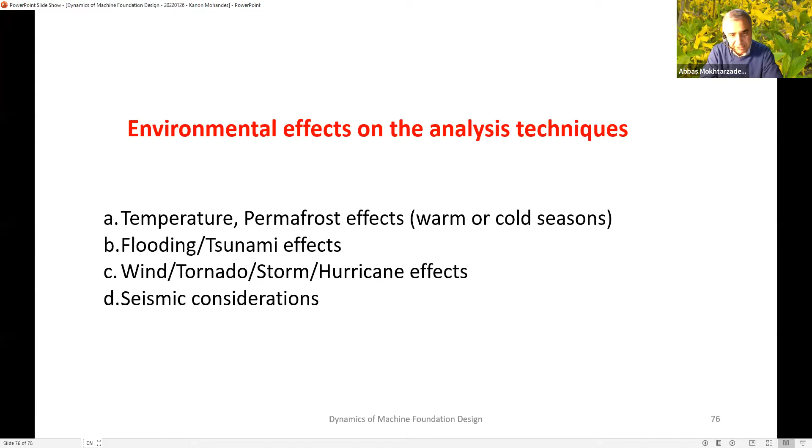I hope I haven't given you too much to bury your brain and load on this, and I hope you have some quick and brief guidelines on the various topics that we know.

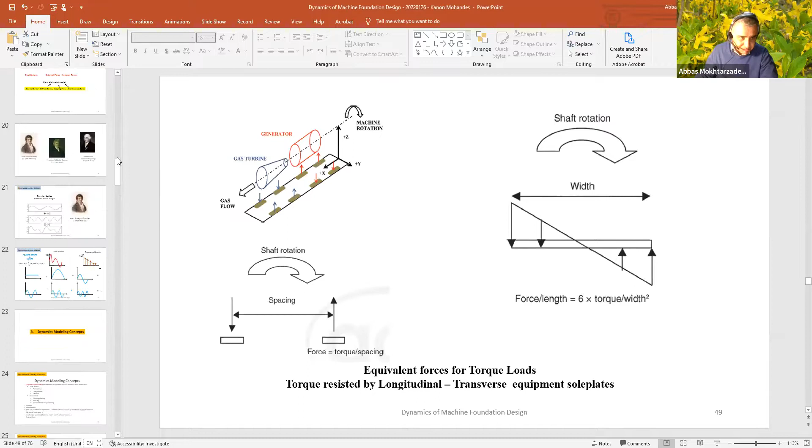اگه اجازه بدید من یک سریع یکی از اسلایدها رو نشون بدم در رابطه با همین موضوع که البته نتونستم روش زیاد توضیح بدم، منتها چون صحبت روی همین رزونانس و 3 برابر و 4 برابر اومد، شاید بهتر باشه اینجا یه خورده به صورت کوتاه بیان بکنم.

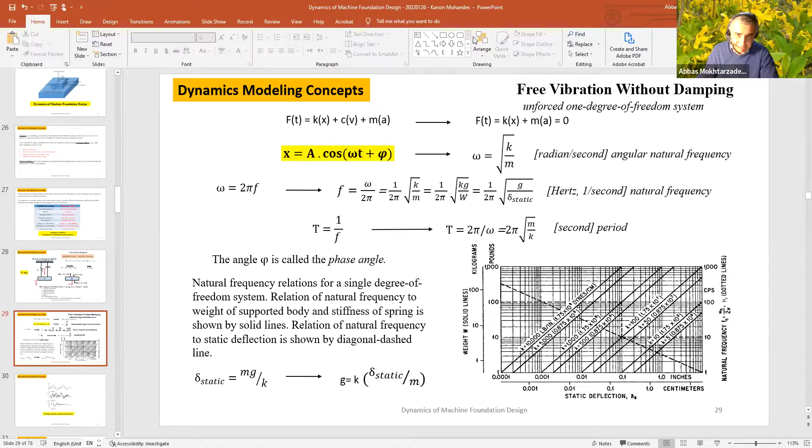این نچرال فرکانسی، اگه دقت بکنید نسبت به K و M داره. یعنی اگر شما این نچرال فرکانسی رو نسبت به یه فرمول بنویسید، F ماشین بر روی F نچرال فرکانسی، این مس، هر چقدر مس بیشتر باشه فرکانس کمتر میشه. می‌تونید یه رابطه پیدا بکنید که اگر 3 برابر بکنید نسبت به فونداسیون، چه برابر فرکانستون و اختلاف فرکانستون رو ایجاد می‌کنه درصدش. شاید یکی از دلایل بوده که مس رو 3 برابر یا 5 برابر می‌کردن که اونو از نچرال فرکانسی ماشین به دور نگه دارن ناخودآگاه، که این کمک می‌کنه به اون کنترلی که باید انجام بدیم.

یک نکته هم بگم: وقتی که یه فونداسیون دارید و اکویپمنت روش می‌شینه، بیشتر احتیاج نیست فکر کنید، همون رزونانس طبیعی فونداسیون رو با اکویپمنت چک می‌کنید. ولی اگه یه فریم داشته باشید، مثلا یک هیت اکسچنجری باشه که طبقه دوم و سوم نیروگاه یا پتروکمیکال پلنت یا هر جایی باشه، موقعی که چک می‌کنید باید هم رزونانس اکویپمنت رو با کل سازه چک بکنید، هم با بیم یا فلوری که ایمیدیتلی زیرش هست، که این معمولا فراموش میشه.

چون وقتی رزونانس رو چک می‌کنید، اولین چکی که باید انجام بدید، اون اولین کامپوننتی هست که زیر اکویپمنت هست، یعنی اون بیم یا فلوری که اکویپمنت روش می‌شینه. بعد این بیم میره روی ستون وای می‌سته یا روی بیم دیگه، باید فرکانس اونو هم نسبت به فرکانس ماشین چک بکنید، یعنی تا برسید به فونداسیون. یعنی این یه دونه چک نیست.